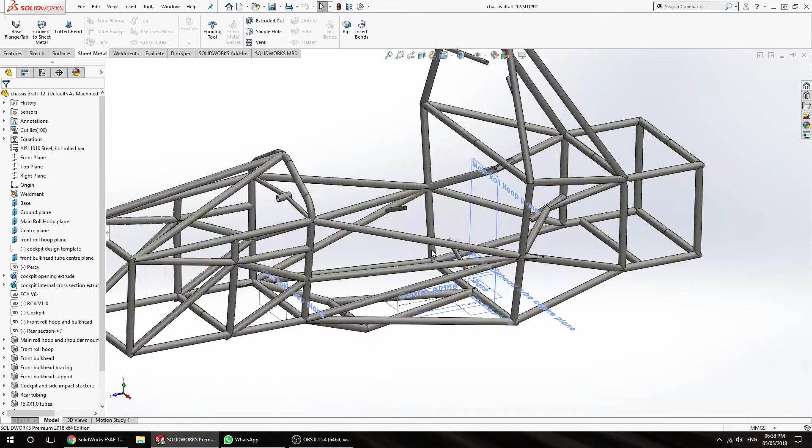For the chassis template that you need to make, you have to open up your chassis. The first thing you need to do is name all this tubing essentially.

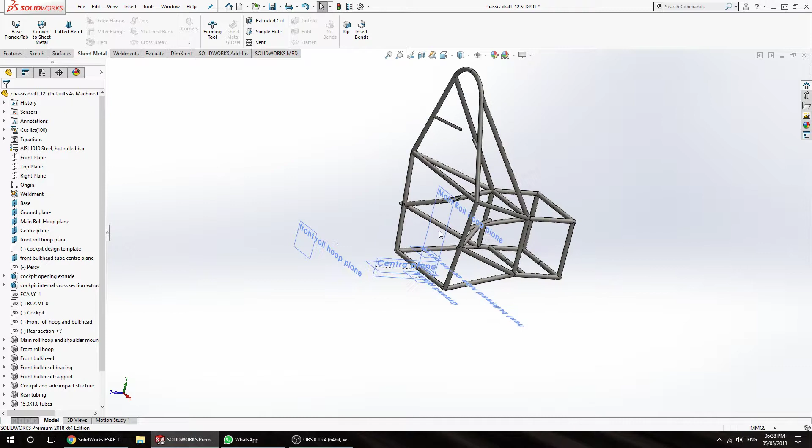The best way to do it is to separate the rear and the front. So I'm going to highlight all this front tubing and hide it, until I'm left with the rear tubing, and then make a drawing from part.

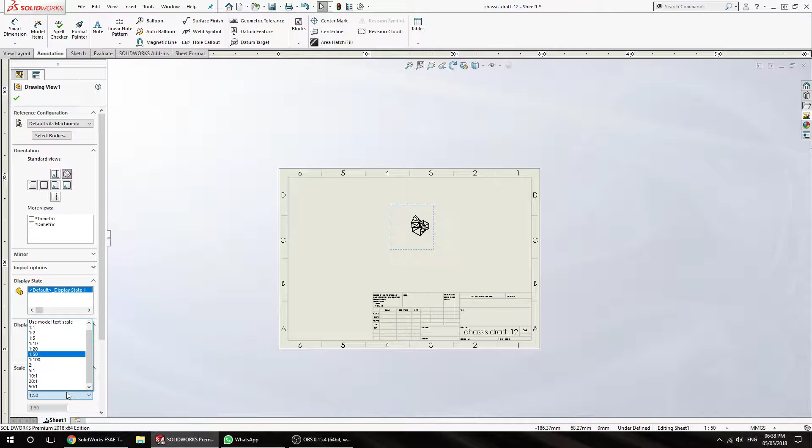Find a landscape A4, click OK. Then drag in a view. I think isometric is suitable, and change the scale to 1:50. That looks okay, right? You can change it, but this is better.

Once you're done, I suggest you right click on sheet format, edit sheet format, select all of this and delete it.

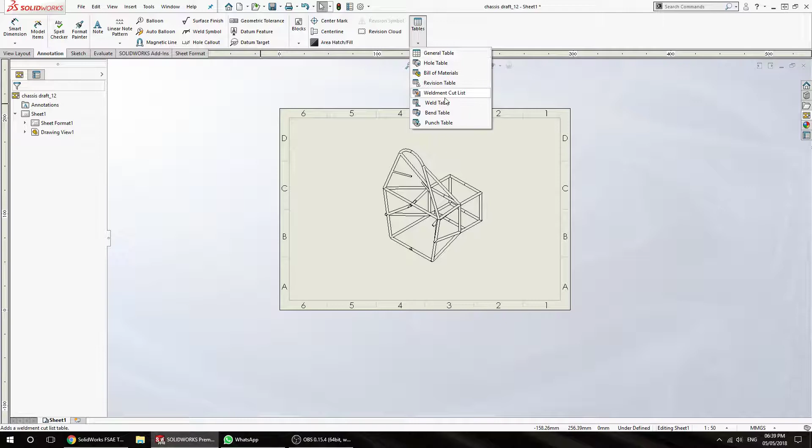Since it's not necessary. The next thing you need to do is under annotations, go to table, put in Weldment cut list, select the drawing and select the view. Just click OK here and you'll get this table.

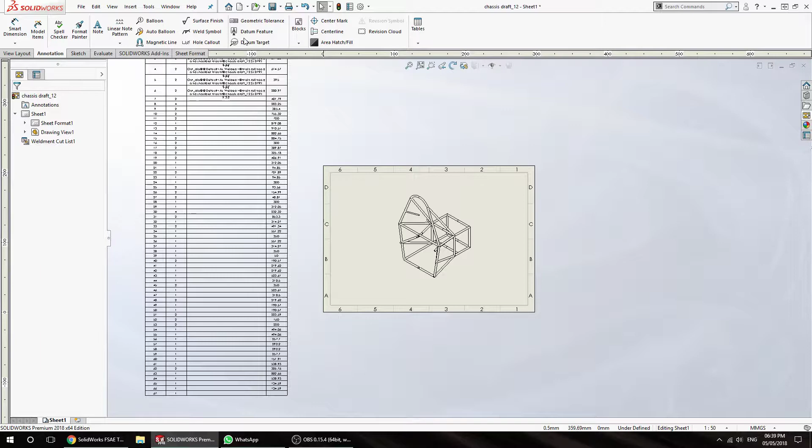Now the table doesn't fit in an A4 sheet, so we'll just put it outside the sheet for now. Once you have your cut list, click on annotation, auto balloon, and click on the drawing. It will name all this tubing based on the cut list.

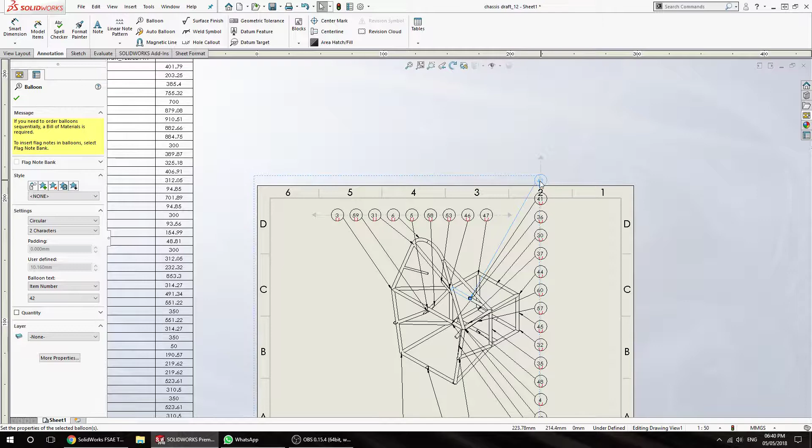You will need to click OK first. Once you get the balloon out, you can move it in and make it all fit into a piece of paper like so.

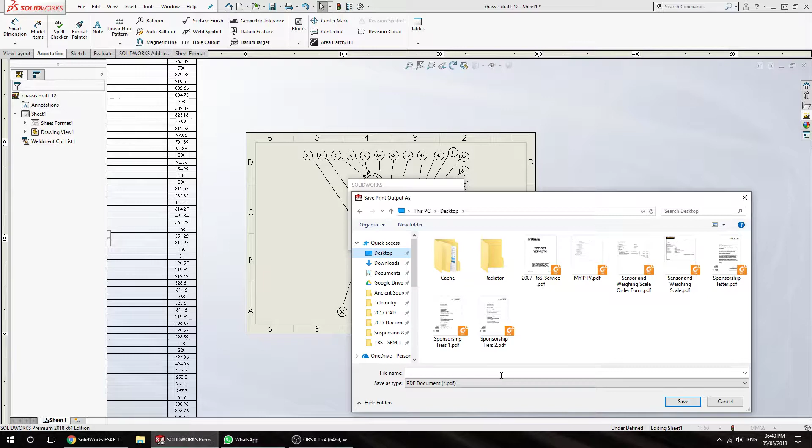Once you're done with that, you can save this, or I just prefer to click print to PDF. I'm just going to print to the desktop. Once that's done, I'm going to just save this.

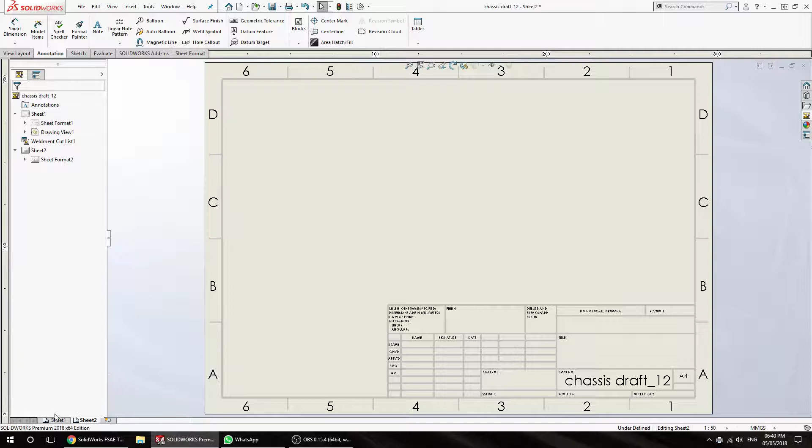For what you can do now is essentially create a new sheet, copy this one, do the same isometric view. This time I'll just put it on the outside of the sheet. Again, I'm going to edit this sheet format and delete this.

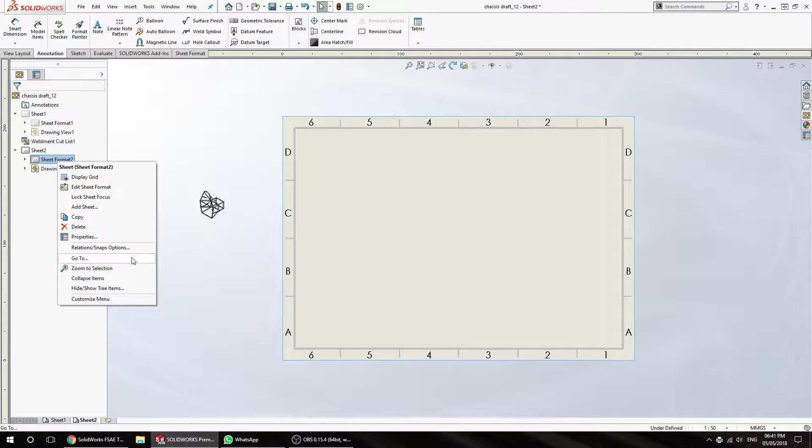I click on sheet property because I want to change the type for sheet format 2 to the portrait version.

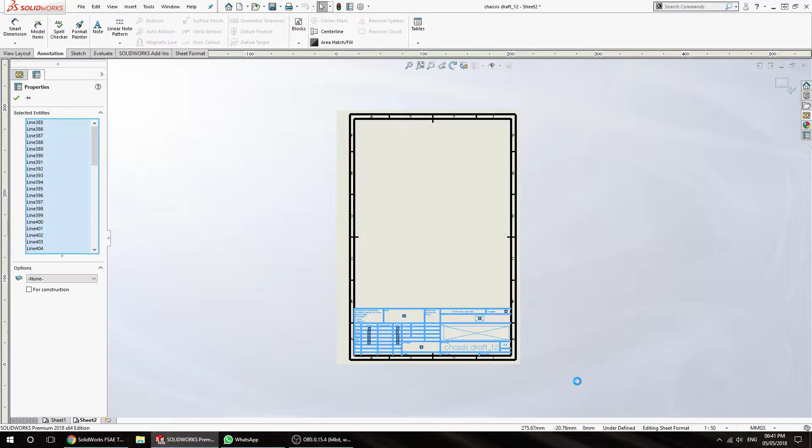Again, I need to edit the sheet format and just remove all of this, right? So from here I can again go to table, Weldment cut list, select this drawing, click OK, and I'm going to get a table.

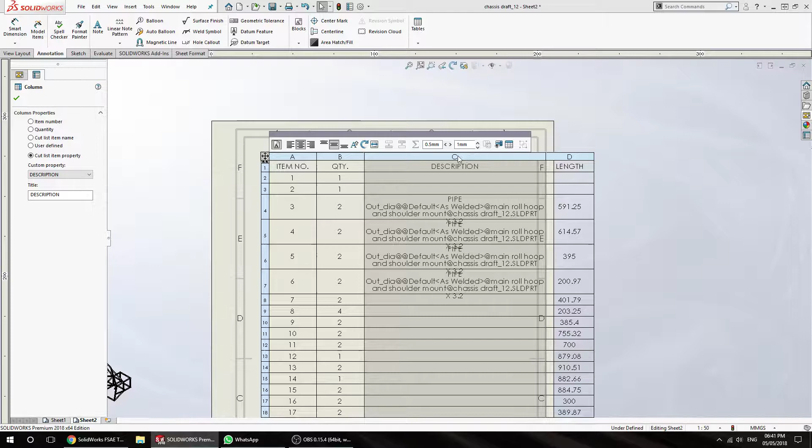This description is usually empty, so what you can do is click on this C part here, click delete column, and you have to size it up so it won't fit, so you've got to figure something out.

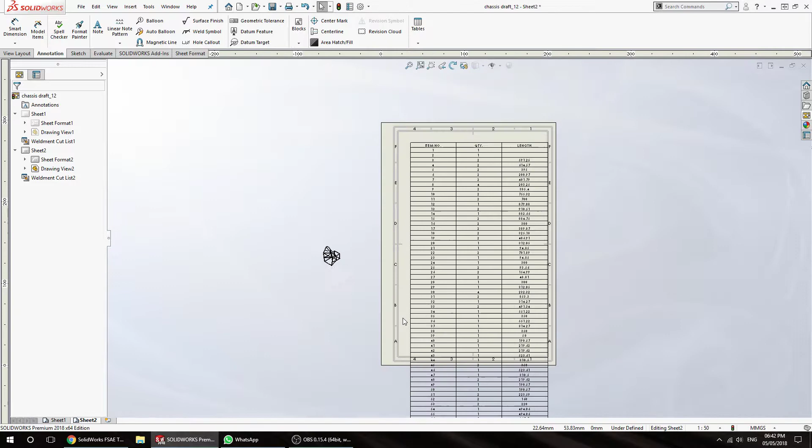What you can do is take it here. I'm going to say split, horizontally above, so I'll get two tables. So now I can hopefully resize this table.

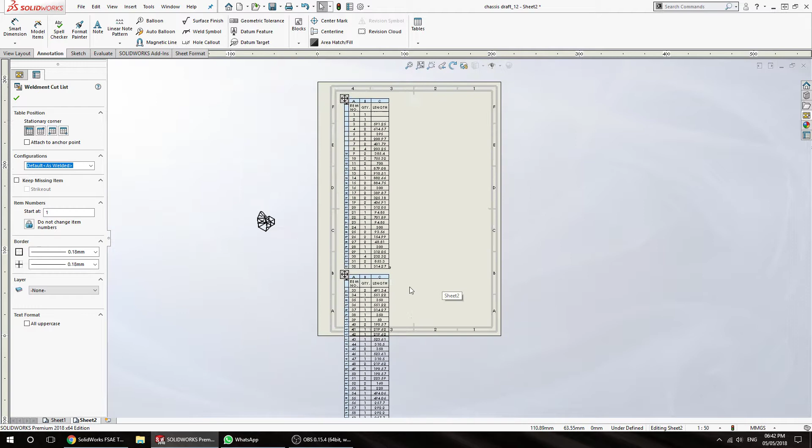And here's the table, right? So if you want the table, you can save this and print it.

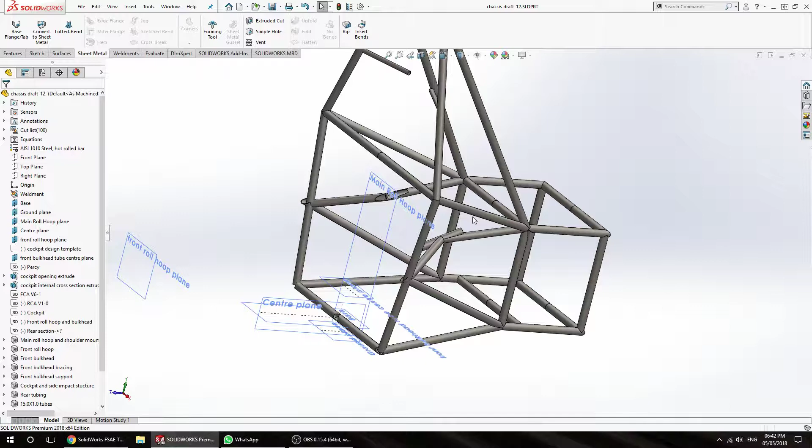Alright, so once you're done with that, you can close this. Now to get to the paper template, I'm just going to quickly open the cut list. I'm just going to refer to this to name it later.

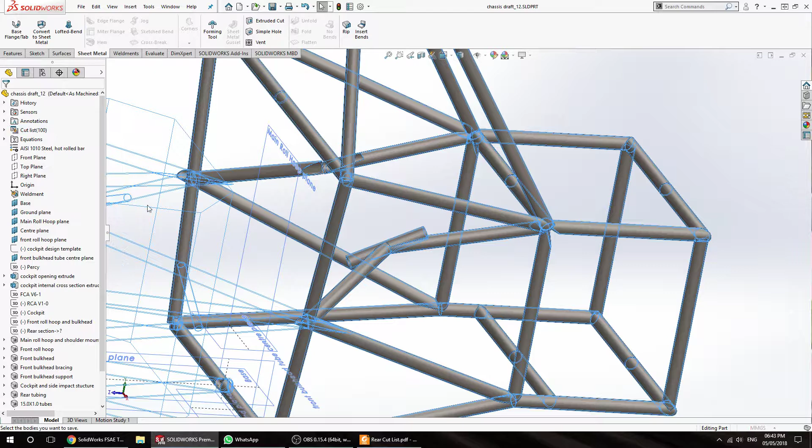I'm going back to here. Let's say I wanted to make the cut template for this tubing. I'll go to the cut list on the left, and I'll say save bodies, and I'll choose this one, click like that, then click OK.

Change the unit of the rail part to the unit of the base part. You have to wait for it to open a new part. If you minimize that, you'll see this is a single tubing.

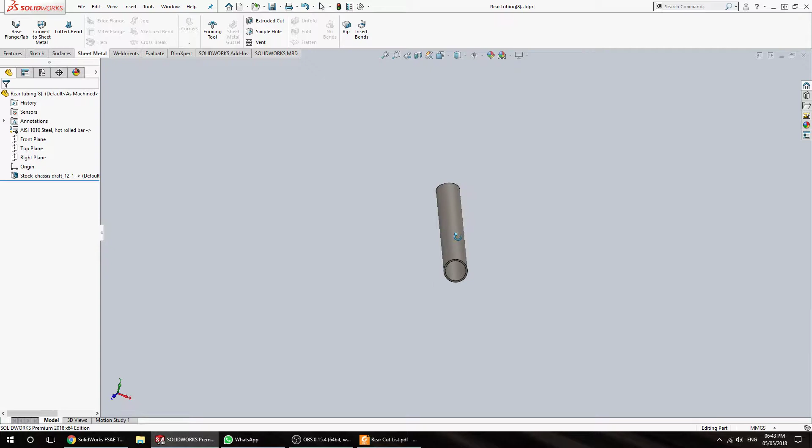So the first thing that you need to do is, this tubing - if it has a flat face, it's easy, you can just sketch on this flat face. If it doesn't have a flat face, what you can do is just choose any of the planes.

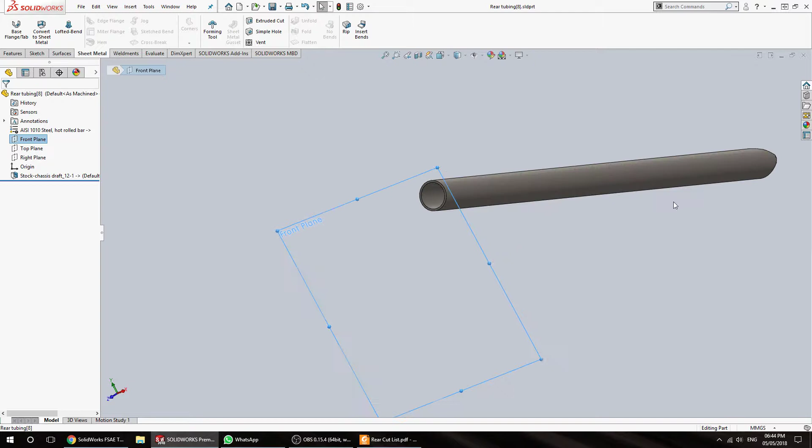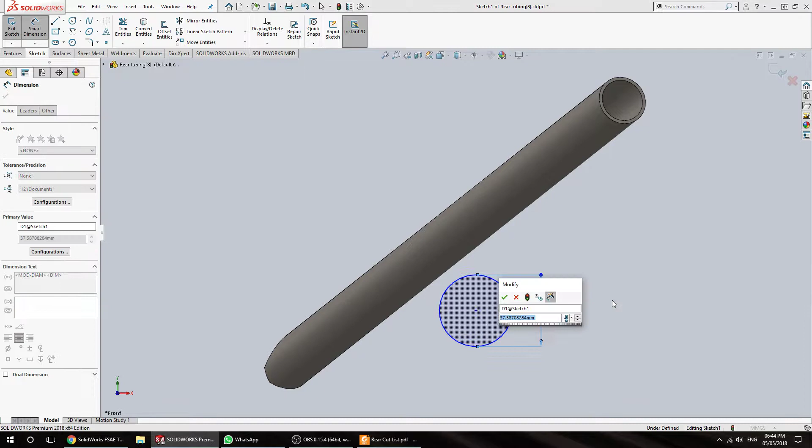We know the tubing diameter is 25.4, the outer diameter. I'm just going to make this a construction circle. What you're going to do next is choose the center rectangle tool, find the top quadrant marker, create a rectangle roughly like so, and the dimension here is 0.01 millimeters.

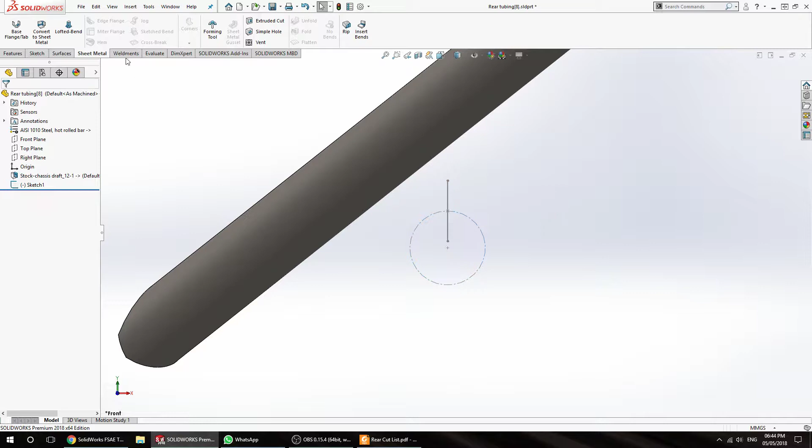Then just exit sketch. From there, you go to file, insert, feature, move copy.

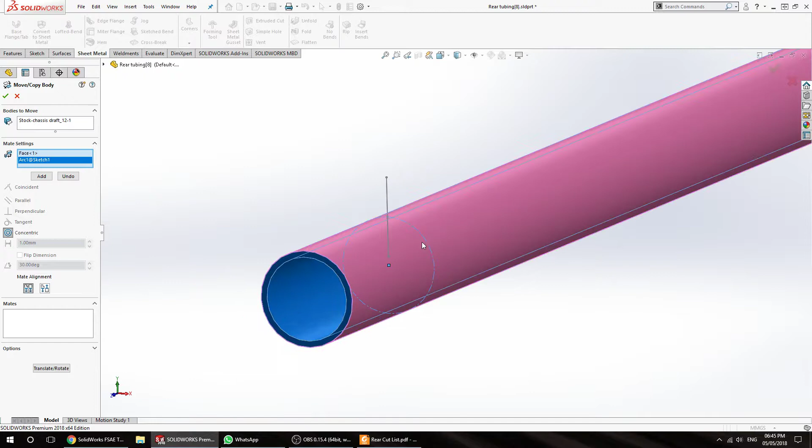So click bodies to move. You're going to move this tubing. Mate setting, you're going to choose the outside face of the tubing and also the outside circle of the sketch, so it will align it. So now we essentially have that sketch along that tubing. So we can go back to that sketch and go feature, do extruded cut.

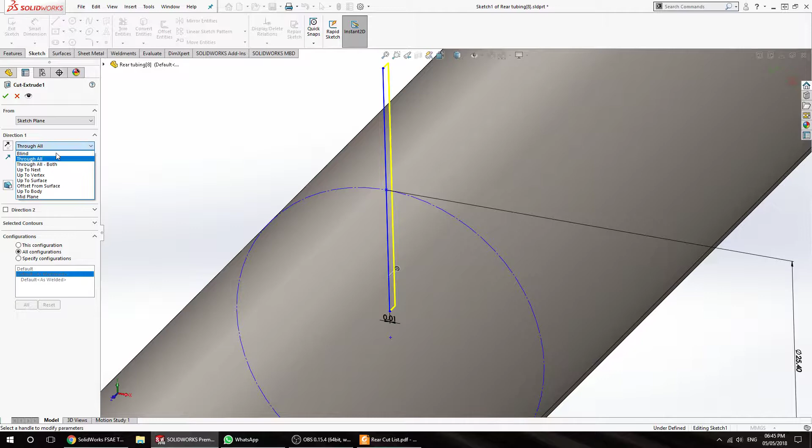Since we already had that rectangle, I'm going to say through all both direction, right? So oops, feature through all both. Alright, so what this creates is a really thin slot. It doesn't really affect our tubing that much, right? So from there, typically you won't have this sheet metal tab open, right? So all you have to do is right click on the tabs here and just go to sheet metal.

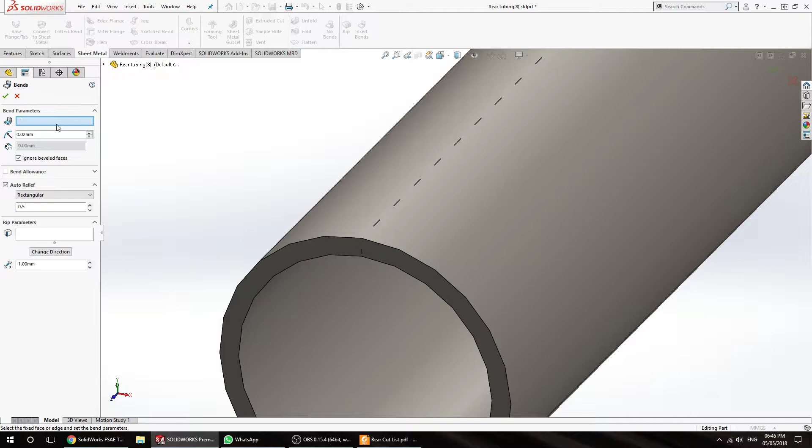Then on sheet metal, the first thing you need to do is click on insert bends, right? And the bend parameter here, for the first one, choose one of these edges, either this one right here or the opposite one right here. Doesn't really matter. So if you click on it, what you need to make sure is that your bend allowance K factor is 1, right? And auto relief is rectangular 0.5, right?

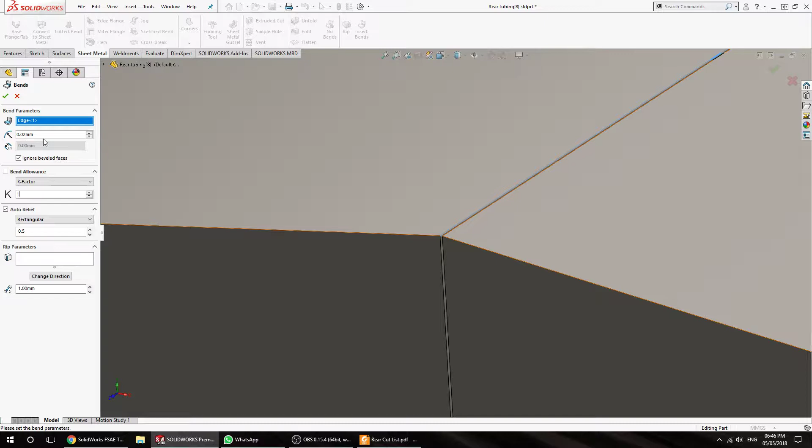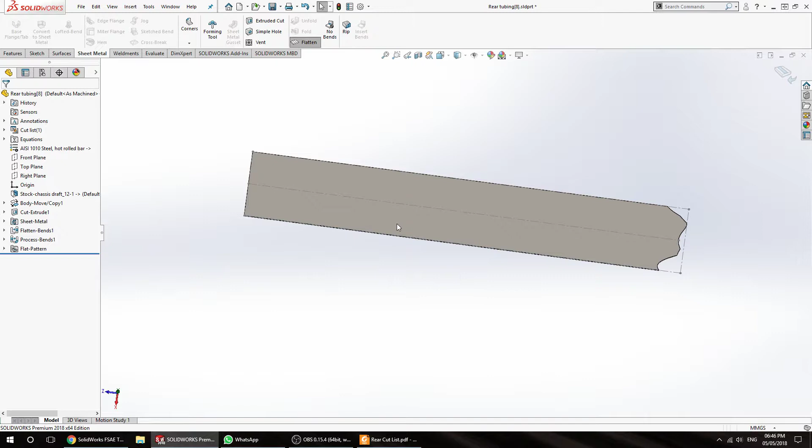The rest of these options don't matter, so just ignore all of them. Doesn't matter what this number is. So click OK. This will turn this tubing into a sheet metal part, which you can then click on the flatten tool, which flattens the piece. So now all we have to do is turn this into a drawing. So click on this outer face, which is the OD, right? Inside here is the ID of the piece.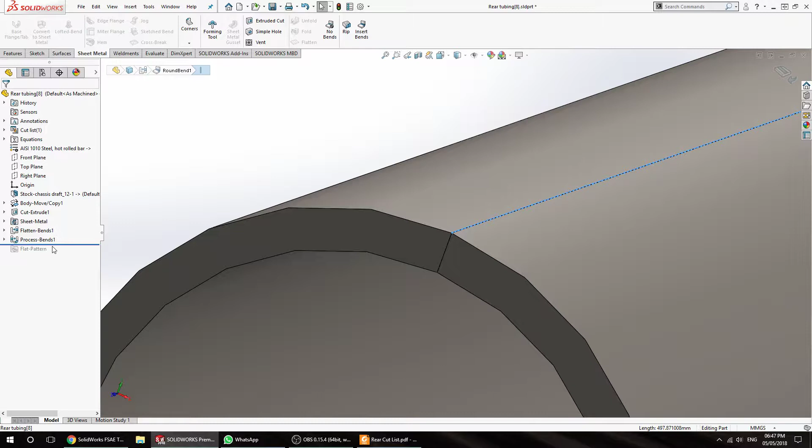So if I were to roll back, since I chose this edge, this edge is stationary and the part is unfolding like so, right? So once it flattens out, since this edge was the stationary edge that we chose, this face is the OD face and this is the ID face. So since this is the OD face, we'll click on it, right click on it and go to export to DXF.

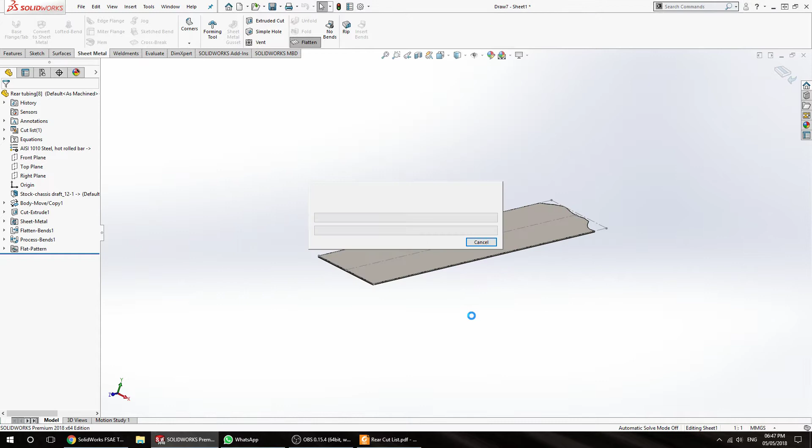So I'm going to put it on the desktop. I'm going to click save, and then just click OK. So this pops out, so just click on save. So now what you can do is open that file, which is here. All right, just go to next. You can move... sorry, you can move later. Never mind. Just click on next. Finish. Sorry, again, I'm going to go open the tubing. Alright, next. Next.

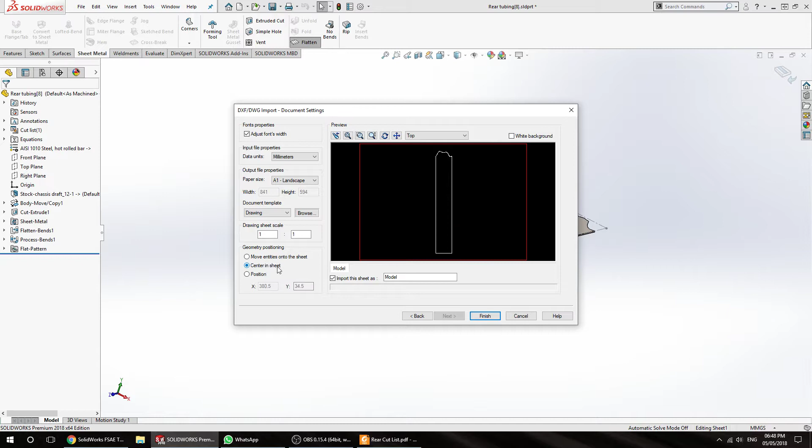So ensure that your drawing sheet scale is 1:1. In this case, it is. So paper size is going to be A1 landscape. A4 obviously would not fit. In this case, the tubing is vertical, so A1 landscape is fine. Then you can click center in sheet to center it. It doesn't really matter, we can move it later. So click on finish.

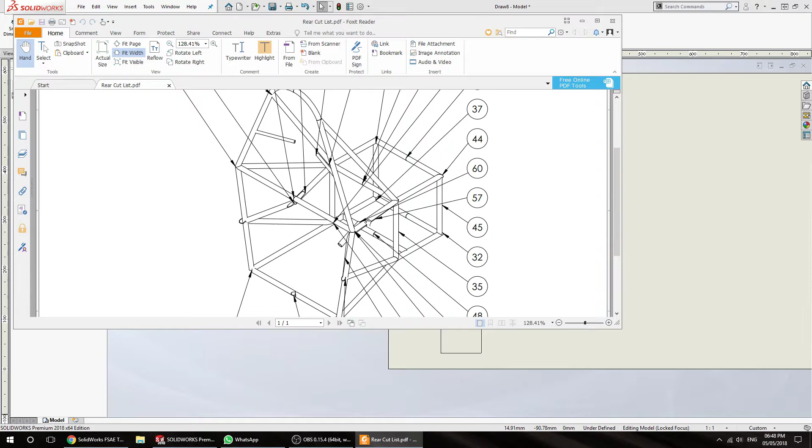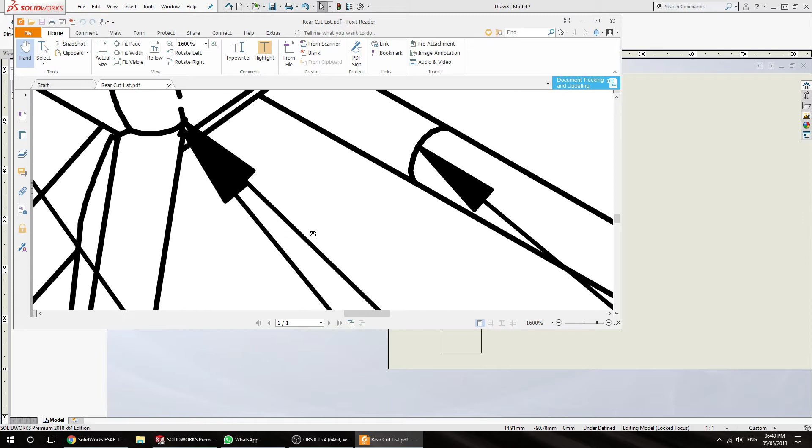So what you can do is select this whole thing and you can move it around. So if you have multiple tubing, you can obviously move all of them as necessary. So the reason we needed this reference, right, is because we chose this particular tubing, which is going to be number... It is a bit confusing to find the particular number because it's not properly trimmed, but I think it is this arrow. It highlights the edge of the piece. It's one of these arrows, so we can go back to the original drawing to actually figure it out. So I think it's this number 43 tubing, right?

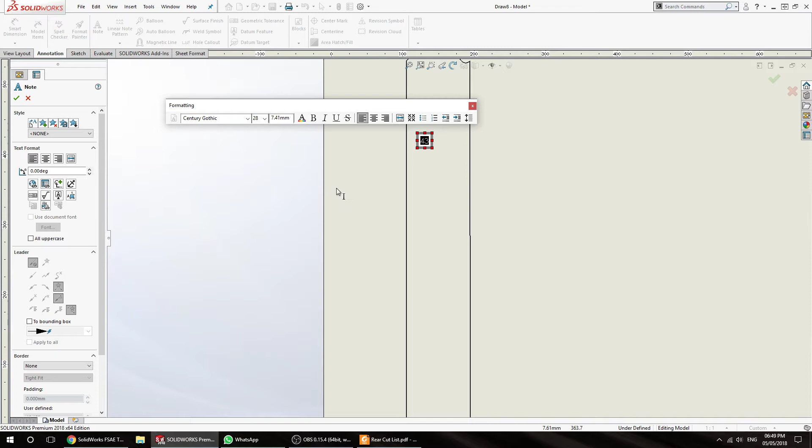So since we know it's number 43 tubing, we're gonna click on note, put a note in here and say 43. Make it as large as you need it. So when we actually print this, we know what tubing this is supposed to be. If you had no number, you wouldn't know which tubing is which. So once that's done, you can just go file, print it to your printer, or in the case that the printer is not attached, you can just go print to PDF, current sheet.

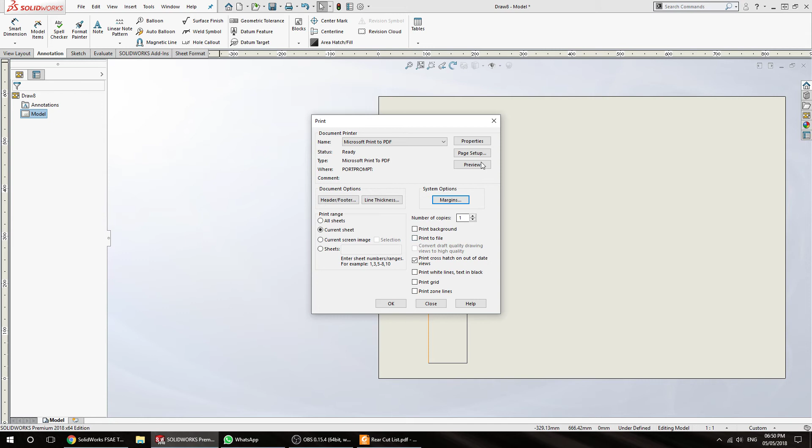What you have to be careful about is to ensure that the print is 1:1, right? So, you know, it's tubing 8. That's essentially it. So you can take that PDF, send it to a printer, and print it out. So you have to do this to all of the tubing one by one. All right. So good luck.